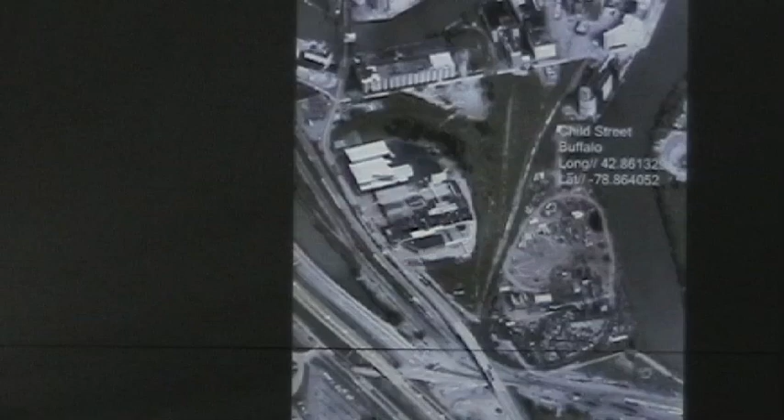This is the site right now. You can see that the new location is framed by these silos, and we wanted to engage a conversation between the two.

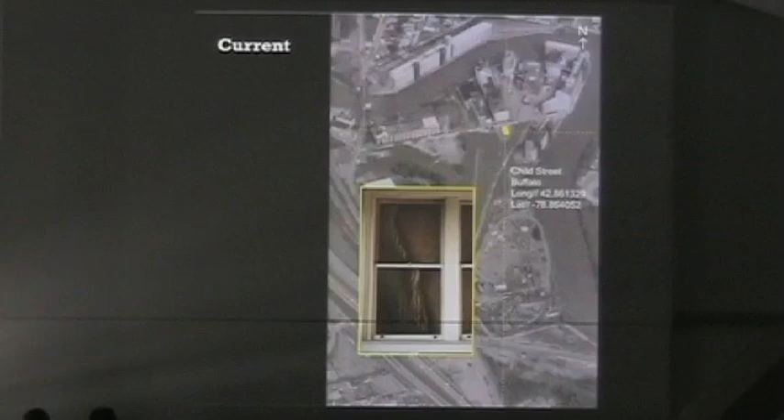This is the current location of the bees. It's within this building on a wall within a window, and we like the enclosure of the space and the relationship that the audience has with the bees through this window and this viewing port.

So we're interested in relocating the current experience of the beehive through the creation of a protected space for bee inhabitation, where humans are able to visually interact in a contemplative environment.

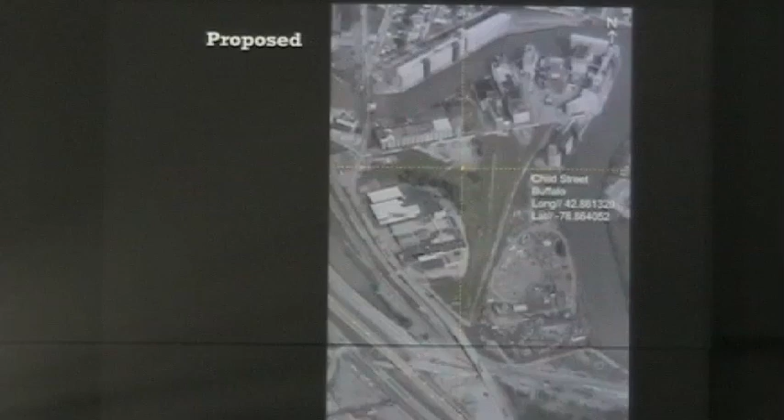This is our new proposed location for the bees. We placed it in this open space, hoping to create more engagement and activity in the open field that is currently there.

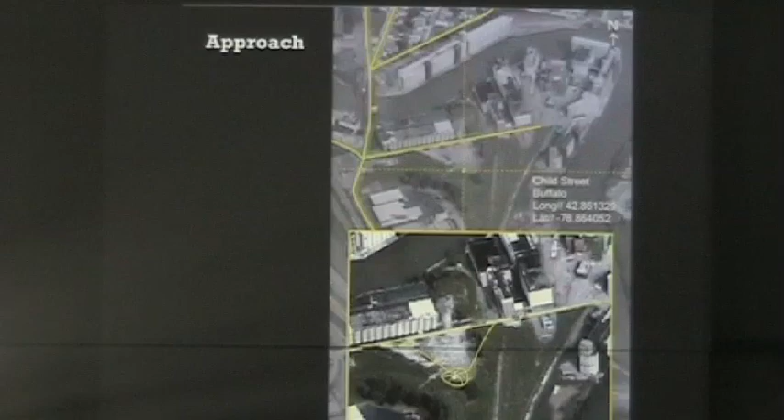We see this space as an opportunity for new paths that might connect the current approach to the site, which is these highways right now.

In doing research for the project, we found that bees are very strategic and intelligent about the placement of their hive, so we wanted to reflect that and try to match the intellect, if at all possible.

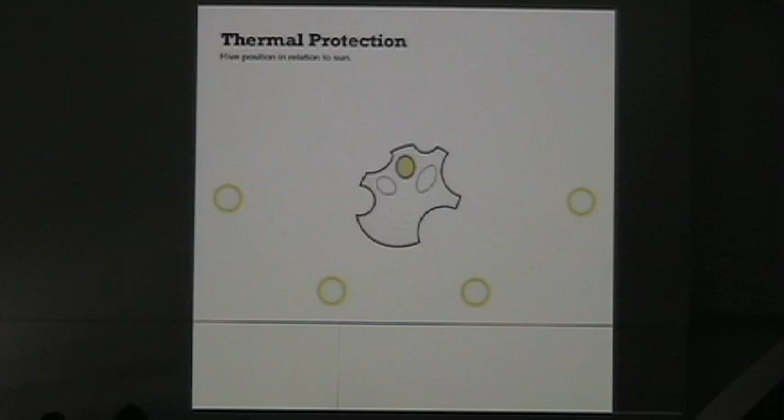So at first, we placed the beehive in the northern portion of the structure. This is to shield it from the harsh summer sun and hopefully keep the space regularly temperatured.

As you can see, the summer sun won't reach the beehive. So the beehive is located right here, and the summer sun will come down at a steep angle. This is at the highest point of the summer.

And then in the winter, we use apertures to attempt to bring sunlight in and heat the space by radiant heating.

To accurately account for solar relationships, the orientation of the project was tested in Ecotect to explore relationships between sun, shadow, and the project itself.

Another factor was the winter winds. We wanted to shield these cold winds from reaching the hive, so a large blockage was placed in the structure.

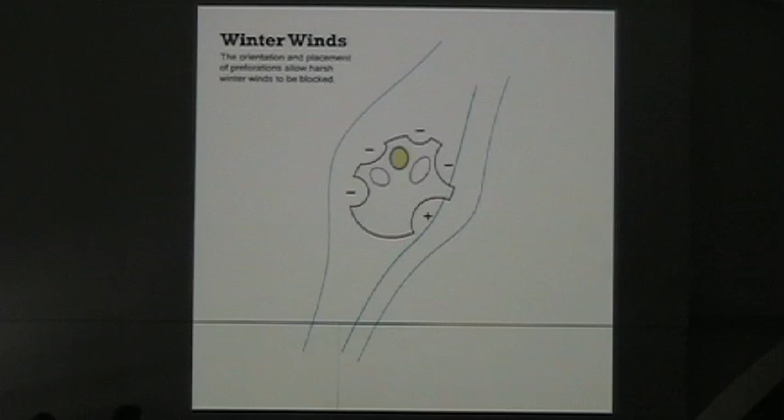So the southwestern corner of the structure is less porous and blocks winter winds. For summer winds, we allow for apertures to accept summer breezes, allowing for ventilation and natural cooling.

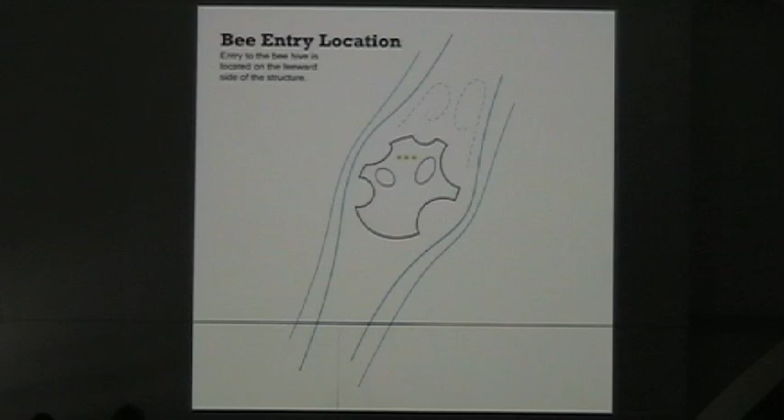As for the bee entry, we placed it in a place where there would be a calm spot in the wind, so the leeward side of the structure. This was just so the bees would have easy access.

Just as the height allows for the bees to be away from the wind, we also raised it up so that it would be elevated from predators that could possibly be in contact with them. It's elevated, and the entrance is slanted down and away from any rain that would be dripping inside.

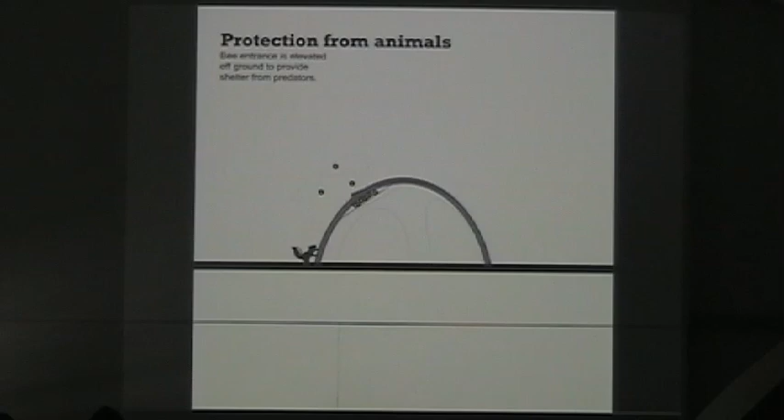And then, just as we allowed height to protect the bees, we also have varied heights of spaces to account for children and adults of any size. So that's showing the different height ranges, and these are some sections showing the different openings.

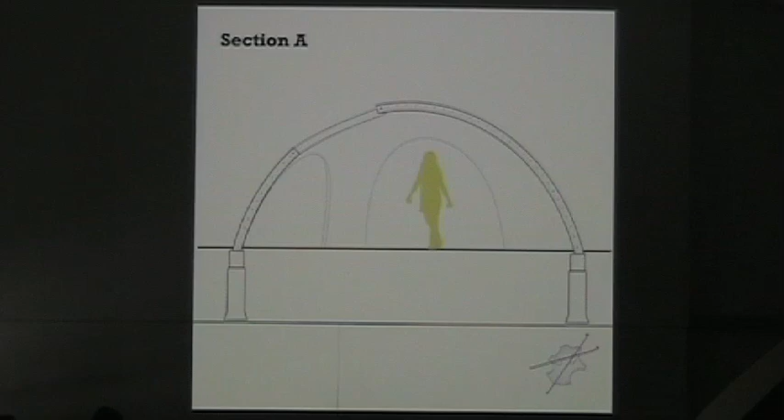Here we see the different views that are pieced together through these openings that were shown in the section. So we wanted to create a framework through these openings that would frame the landscape together, piecing together this landscape of all the grain elevators through these views.

Now you can see how you can start to piece together this landscape through these openings, and then we place the beehive right in the middle of that, so you can see it in combination with the exterior and interior of the beehive.

In this image, you can start to see a relationship developing between the enclosed space and the texture of that enclosed space and that of the grain elevators, the frames which it views, or the views which it frames. So you see this texture relationship begin to develop between these two.

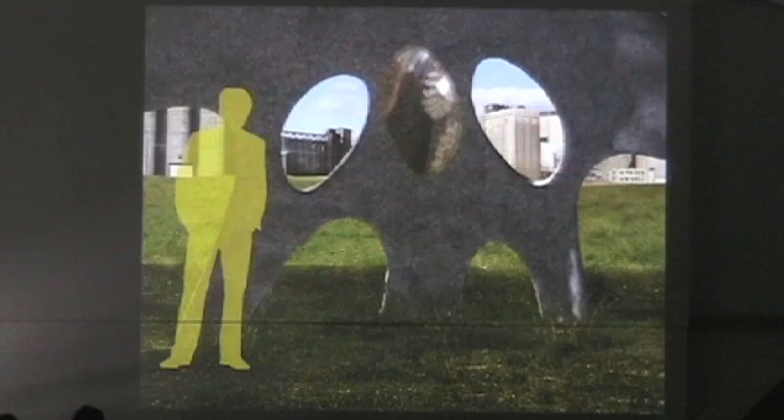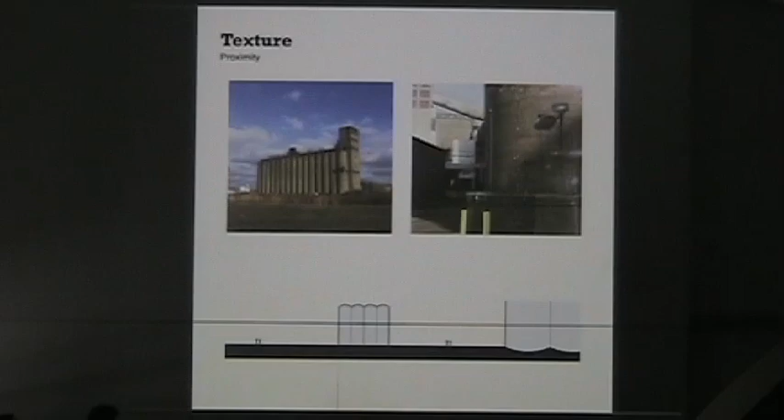With the grain elevators, from a distance we see these rippled vaults, kind of vertical vaulting, but when you approach them up close, you see a very smooth, austere surface. In our project, from a distance it appears as this smooth object in the field, and as you approach it, due to the construction techniques, it actually forms these pillows, so the same rippling effect is seen within our project.

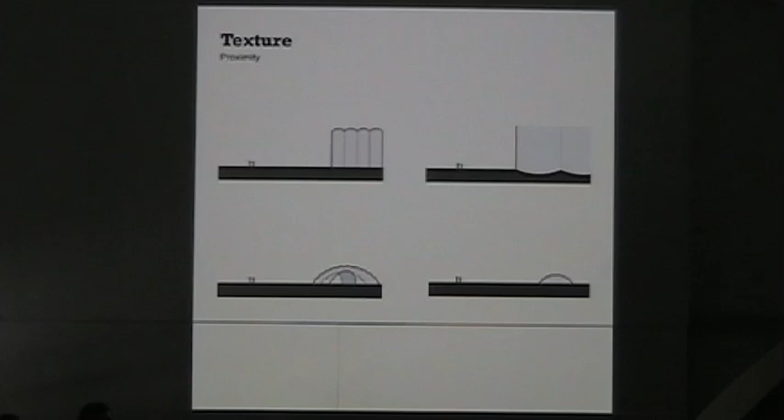Once you're inside the project, up close to the texture, you begin to see that mimicking and reciprocal relationship between the project itself and the site in which it is placed. Again, if you're close to the grain elevators, you see similar textures with this smoothness, so they have a relationship that speaks to one another through the construction techniques.

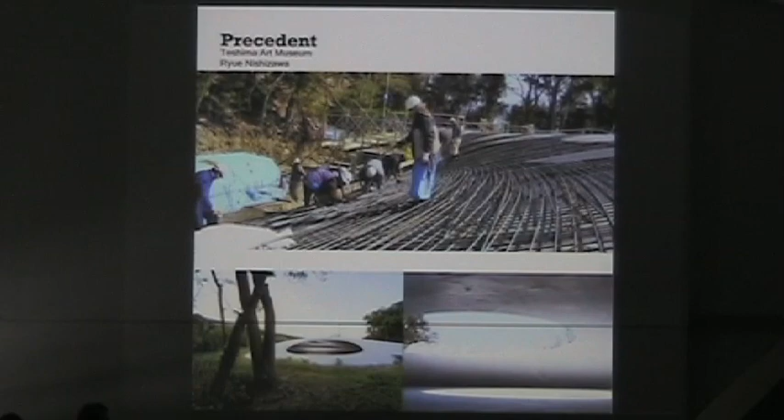To structure it, we looked to Nishizawa, who created the Teshima Art Museum, in which he used a terraform to create the form of the object, then excavated the earth within it using reinforced concrete to create the enclosure. In our project, we're using a similar formwork where we create an earth mound, tamped down in several layers, and then over that we propose to cast a canvas bag that we'll fill with concrete.

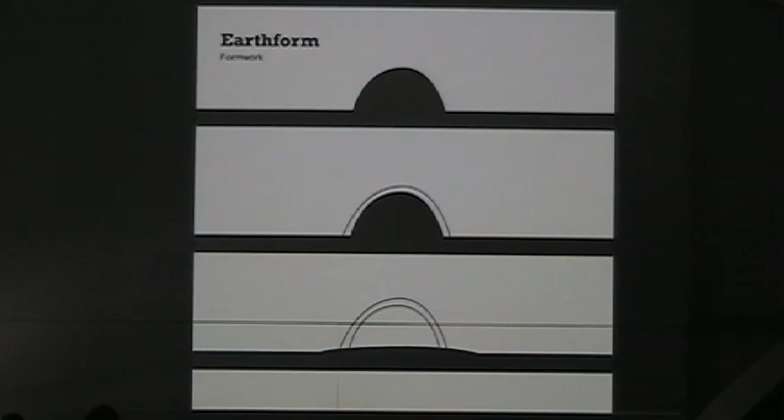You can see portions of that in our model, how the canvas will begin to form the actual structure. This is the process of how we built our model.

In this process, you can see how we're using this similar technique of creating the soil mound, tamping it down to build up to the form we're trying to engage in. We used different techniques to make sure this form was what we were interested in and the right shape, and then you can see how the canvas would literally just be draped over.

Inside of that is a wire mesh with rebar around the openings to support them, and then it would be filled with concrete to create this pillowed effect that is seen. Once this is done, the process is to excavate the dirt from inside, and you're left with this kind of sculptural object in the field from this construction.

So once again, reiterating the way that this form will be created and the foundation on which it will sit. This is the roof line. For entry spaces, there are a lot of points where different people and air, which we talked about, will be able to enter and circulate through the building.

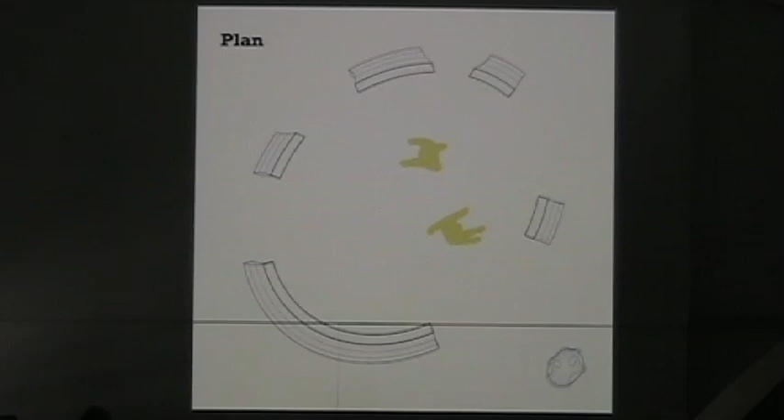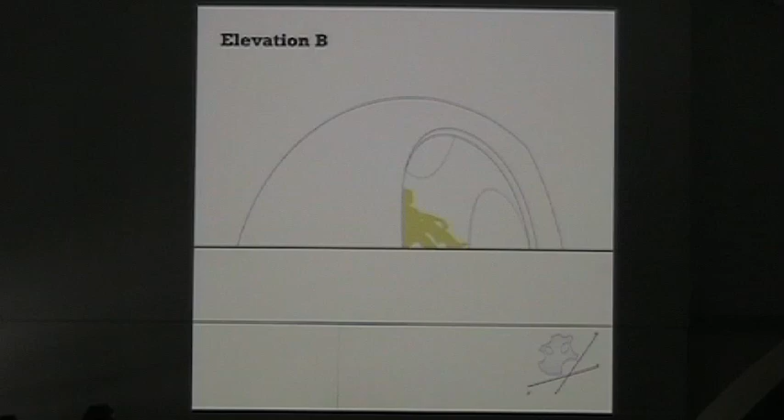This shows the relationship with the human, and our tribute to Rick. This is how the object would sit in the field in relation to the site, the pillowing effect, the ripples, and the contemplative space to view the bees. Thank you.

We also posed this to the beekeeper, and the response we got was that the bees will inhabit any surface, as long as it's the right climate conditions—the bee will adapt to anything. The wax they create is very adherent, so it will stick to any surface, even glass. In their current situation, they're actually attached to both plywood and glass, which shows how they can adapt to these different surfaces.

We're considering a plexiglass plane or pane that would sit in, trying to replicate the current situation so the bees are set upon something and enclosed. It offers protection for both the bee and the human while allowing them to be visually connected. The two surfaces against each other are concrete and glass—though it wouldn't actually be glass, more some sort of plastic—and they enter from the outside, which creates that separation between the humans and the bees.

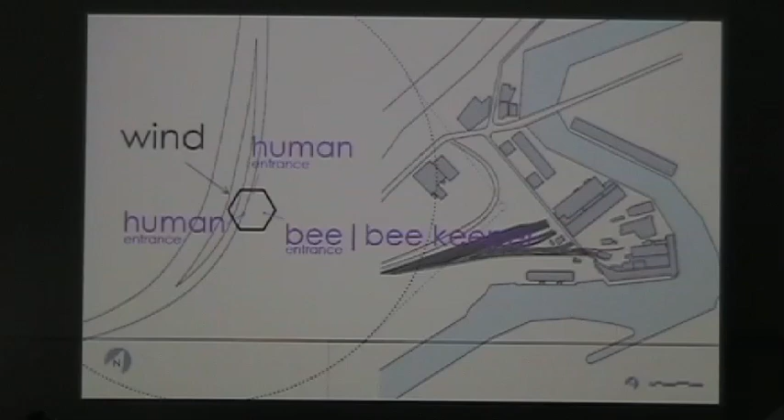And our general materiality is the structure would be steel, and then panels that actually enclose the hive are metal and glass, and then the actual box or the bee cab where the hive is located would be wood for a little bit better thermal mass.

Here's maintenance, and there's a pulley system in order for someone to be able to lower the hive, and then there's a door that opens up where it would be large enough for someone to stick their arm in. The depth of the beehive is small enough where you could stick your arm in and actually be able to reach all the way across.

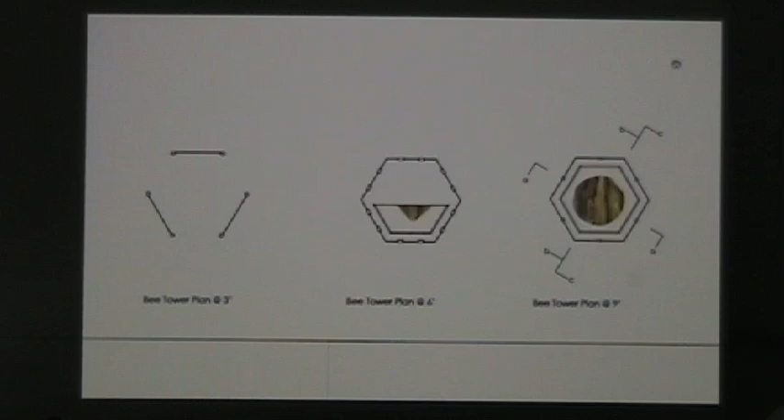So the bee cab is also a hexagon with a diagonal cut for greater viewing, and it slides up and down. There's 3 holes for the bees to enter, each an inch, and then in our outer skin we have panels, parts of them open up and allow the bees to enter in the same orientation.

Here we have an access door for the beekeeper to get in and clean or maintain the hive whenever he needs, and all he has to do is lower it. The material is plywood, 1 1/4 inch thick, that will protect the bees and give them warmth, and we also have the double skin which will add more protection.

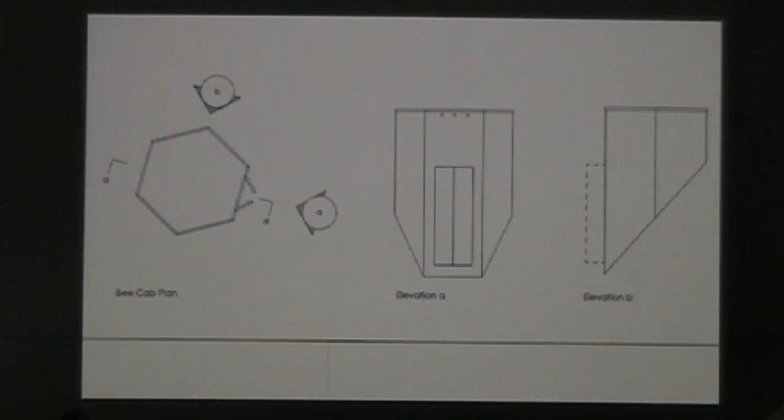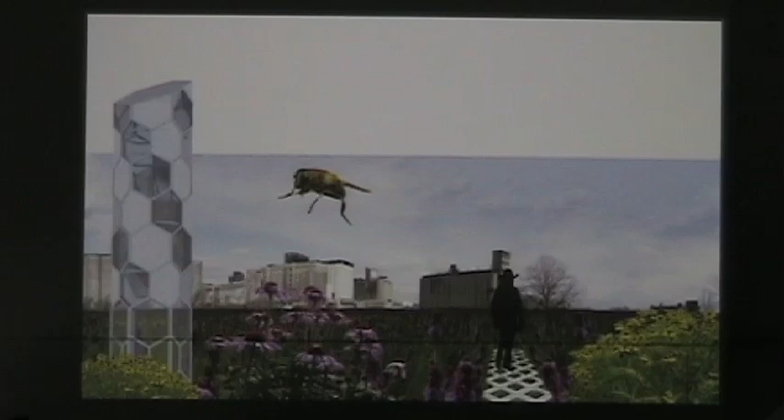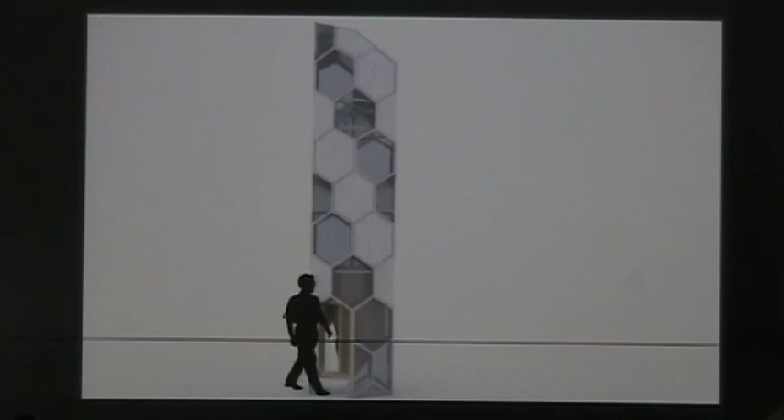Here's some model photographs, so you can see the entry for the bees when we open our panels. It also looks at how it breathes. And then here you can see the entrances, which are about 4.5 feet tall.

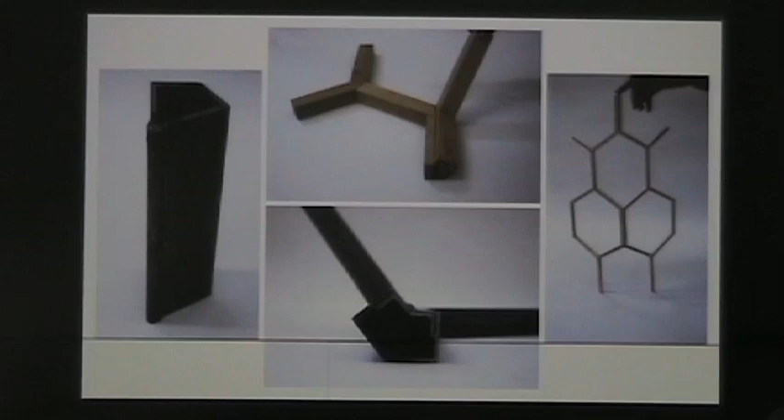So we basically looked at fabricating a tower out of just standard steel sections. We had some earlier tower designs that had columns, and then we wanted to get away from columns and open the corners up. So we kind of started to come up with this kind of structure where the column is kind of staggered.

This was an original size column which, we learned from the engineer, we could make smaller. So we basically worked out a system with both 1.5 inch steel tube and then 1.5 inch angle and 3/4 angle to get the 60-degree corners we need in both plan and section.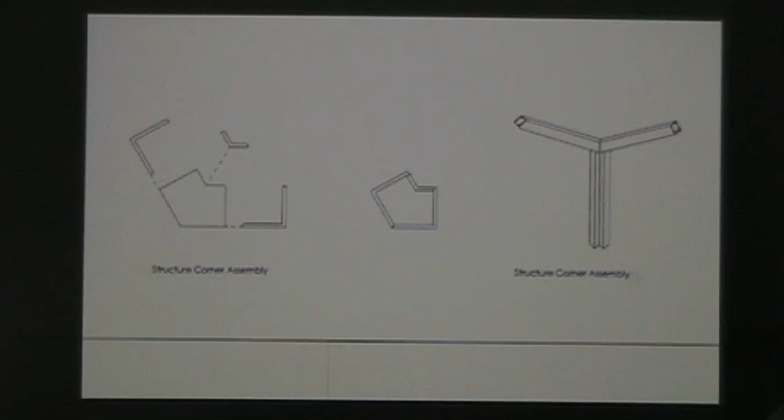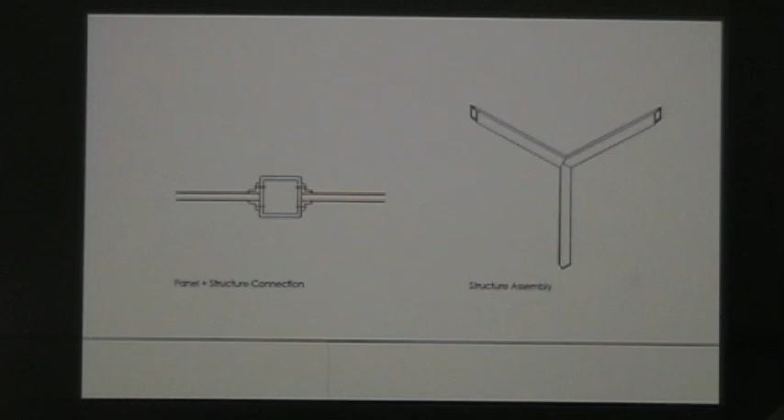And then this is showing basically how the panels would be inset into the structure. The way the panels are here, so it's just showing that's on both sides. And then Dan, you might want to talk about this.

Yeah, I'll cover more about the foundation in a bit. This is just sort of a construction diagram for the vault footing, the foundation.

So basically what we have is the loads being distributed through a structural web, and there's 3 tension rings or compression rings within there, and they each have a dual purpose. The 2 ones on the bottom are for a seal, so the bees, when it's moving, can't get to the people at the viewing area beneath. And then the top one is the actual rig for the cap itself. So those are their general locations, and they'll provide stability for the structure.

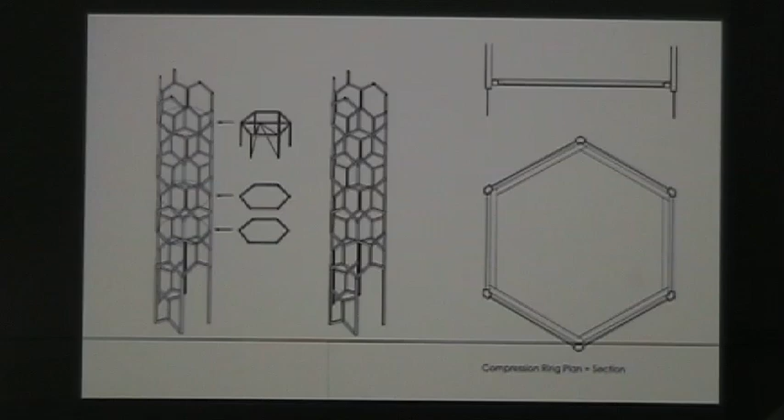So I did some quick wind diagrams and calculations in order to figure out what we would need for the foundation. There are 2 options for that. We have vault footing, which is shown here. The actual number was 10.8 kip feet for the overturning due to the wind, and the calculation also takes into account the rough shape, it's a hexagonal solid tower structure.

And here's the other option we had in mind, a buried slab, and this also goes through the calculations for the overturning.

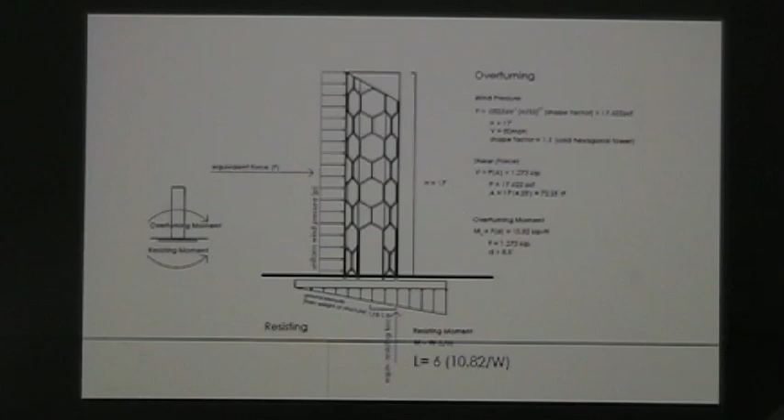So this is just a quick animation showing the process of actually constructing the thing. It's going a little faster than I could speak, but you can see what's going on.

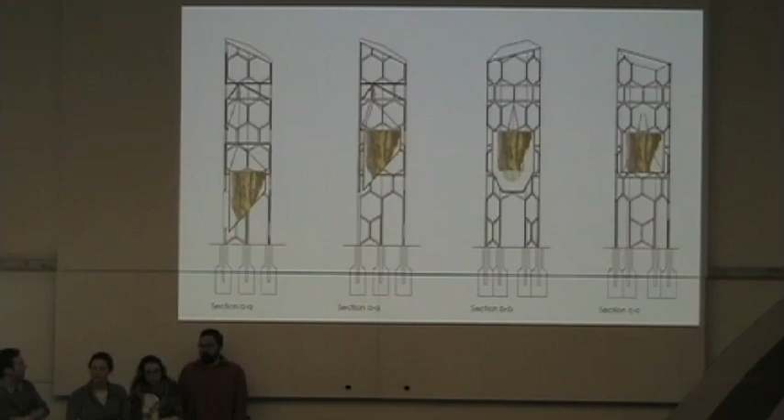Can you not have the additional compression rings? That seems like overstructured. We could. Currently, well, we definitely need the top one, we need something that holds the entire net up. Why? You've got a hexagon at the top of the tower. Well, I guess we wouldn't technically, the bottom ones are just, there has to be something on top that structures it.

We could bring it in at angles. You could frame a lid. Right, that will change for it. It just seems like you've already got a lot of steel, and if you think about your compression ring, because you have a fully welded structure, is that right? Yeah. Okay, so instead of your compression ring being like this, your compression ring is like this, going around. So it's not that you don't have it, it's just a bit more complicated. But it just seems to me like you could eliminate it.

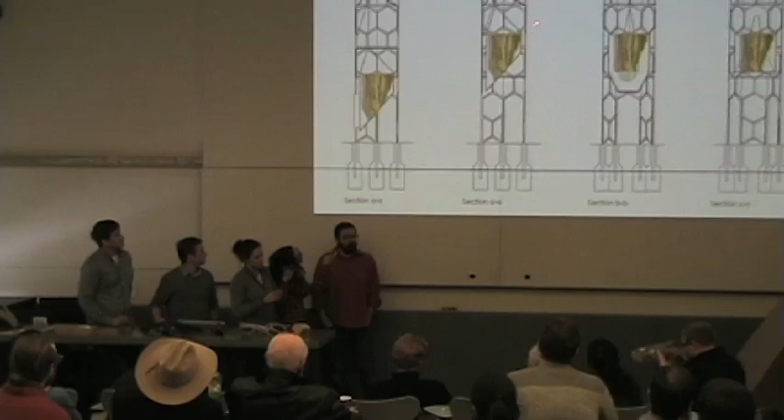The other consideration though is seal. We worked it in, we wanted from day one to have a seal, so it's kind of this area where only the bees can get in. As you move the cap, we don't want them to be able to slip out. So we're going to have a gasket around, so there's a distinct separation between the bees and people. So then we worked in the compression ring with that. I mean, we can rework the seal. That's my fault, doubling the compression rings.

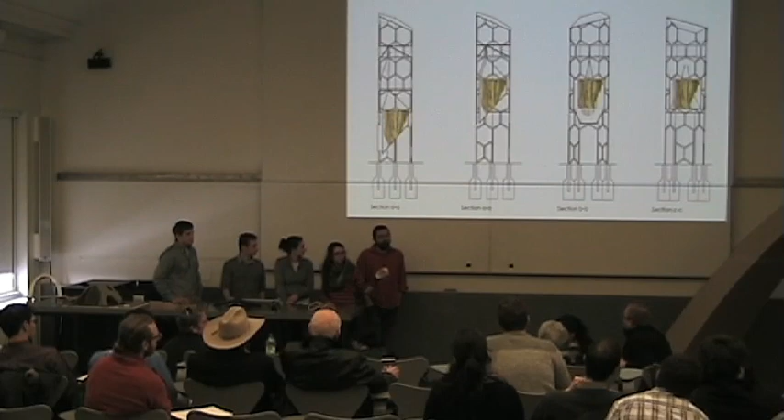The diagonal slice on both the cap that's picked up on the form, yeah. At the top, why is the geometry different? This is just a clean slice, but here the geometry starts to bend. Playing with that model, that's actually different than the drawings.

So I built a model. I mean, the model's sort of a working model where I was just playing with the surface and seeing what it could do.

I think there needs to be a cohesive approach for the geometry and the patterns. Right now, it's something here, something there.

So you're saying that only the beekeeper would be able to lower the ladder? Well, anyone else who has access to that key. So people who are just walking on the site can't lower it. So how far above the cliff is it?

It's like 6.5 feet in the air. So it's really close, yeah, if they were standing in it, their head would be here, they'd be looking on, when it's in its raised position. That's in its raised position. So it's always visible, whether the beekeeper's there or not.

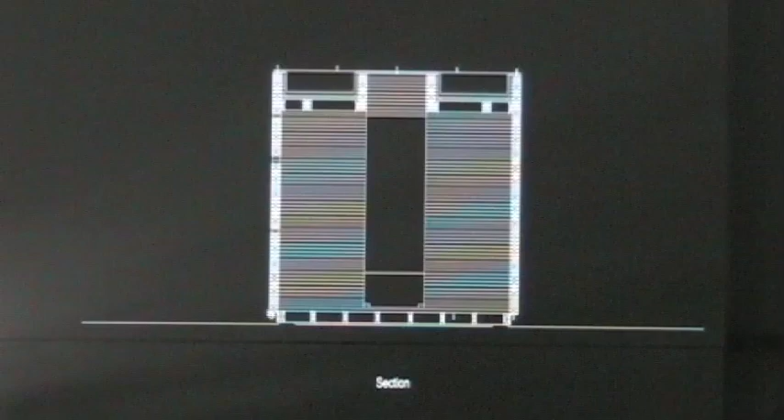The bees live in this little window over here. That's our new beehive, installed in the opening. That can be removed for inspection, or if there's any problem with the bees.

Oh, I'm going back, I'm sorry. I'm the one that's going backwards.

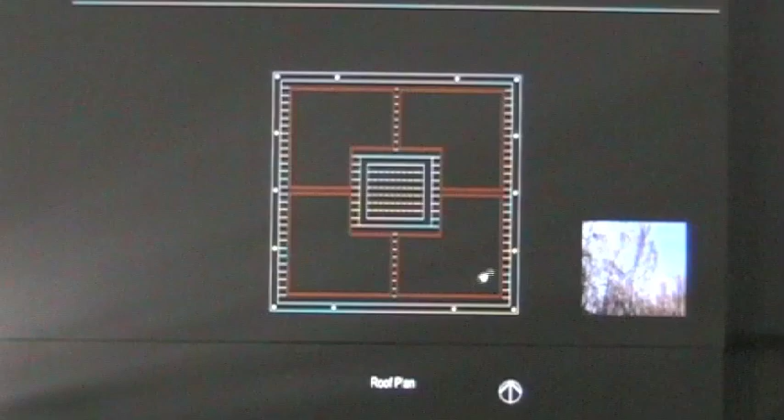Again, in the ceiling, the oculus is open to allow. And in the roof plan, there are indigenous plants, as we mentioned, growing in these boxes.

The west elevation has small holes, loaded up with sticks for other insects to inhabit the building. My teammate Scott said something really nice about those: nature thrives on competition. So rather than being a house that's only for bees and only for people, we've tried to pose the question that other species will live here in all of the projects, and why not offer a habitat for those as well.

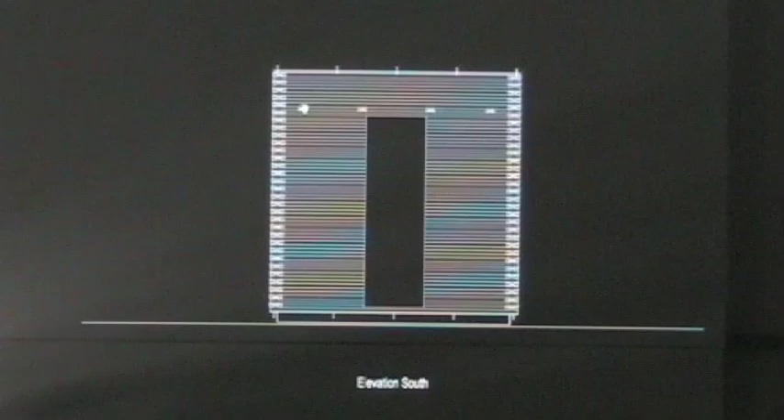The east elevation simply describes the construction. The south elevation shows the human door and also hints at what is to come inside. And the north elevation is the entrance for the bees.

So that panel is just situated in the building, and these little holes are the bee doors. So again, the project is based on the experience of just going into this thing and observing the bees.

It's exactly what we've started out with: a window in a room where people can quietly observe bees, hopefully not disturb them, but just enjoy their company for a few moments. Thank you.

It's just over 10 by 10, a 10 by 10 cube. And the floor to ceiling height on the inside is, I think, 8.5 feet. And then the roof garden—it's not really a roof garden, but it's recessed below so that the plants kind of just flourish on the top.

Did you talk about the site? Its autonomy from the ground condition means it can really be placed anywhere in that field.

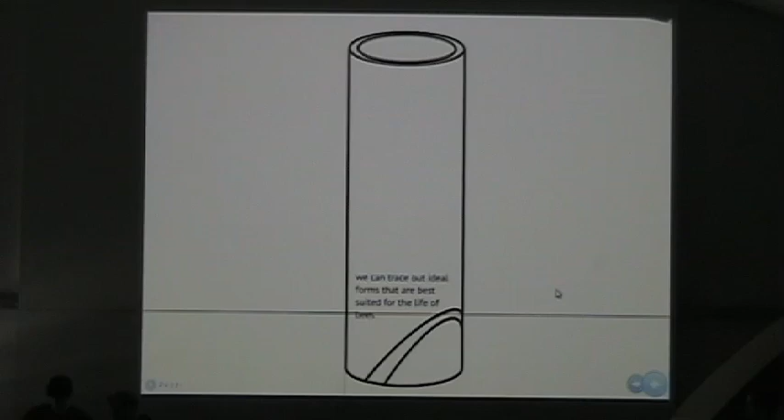Using the site that surrounds the existing colony and the architecture of the grain elevators, we can think about formal qualities that the cylindrical shape contains, and how we can produce effects that connect the beehive with visitors, the bees living there, surrounding nature, and solar patterns. We trace out forms and derive the right geometry from these elevators, giving people a different perspective on this older generation of transporting grain versus this newer generation of transporting bees and honey.

In response to the site, we tackled a few major issues. One was analyzing traffic patterns and how we can orient the sculpture to draw visitors in from the west side, the east side, and the north side, bringing them into the park.

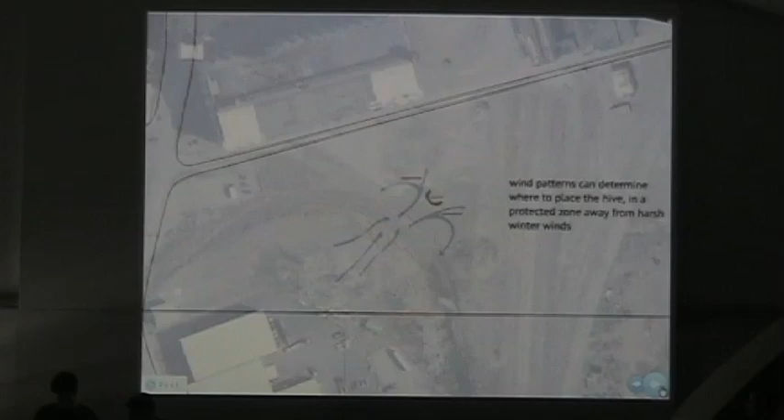Winds come primarily from the west and southwest, and bees don't want harsh winter winds. They usually build hives in small crevices where wind doesn't affect them, so we designed the structure to split the wind, protecting the hive on the inside layer of the project.

The last thing we analyzed was how the sun would react to this. In the morning, when it's cooler, the sun warms the hive and the bees react, starting their day as the sculpture warms up. At midday, when the sun is at its peak, the thermal properties of the material we're considering, concrete in one example, would heat up and release that heat slowly into the hive overnight, reducing temperature fluctuation, which is better for the bees.

In summer, when the sun is highest, the sculpture protects the bees from direct sunlight, since they don't like constant direct sun. In winter, when the sun is lower but it's colder out, you want some sun to heat them up. Chris is pointing to where the hives would be—since the sun is lower, it would touch the beehives directly, as modeled in the smaller model.

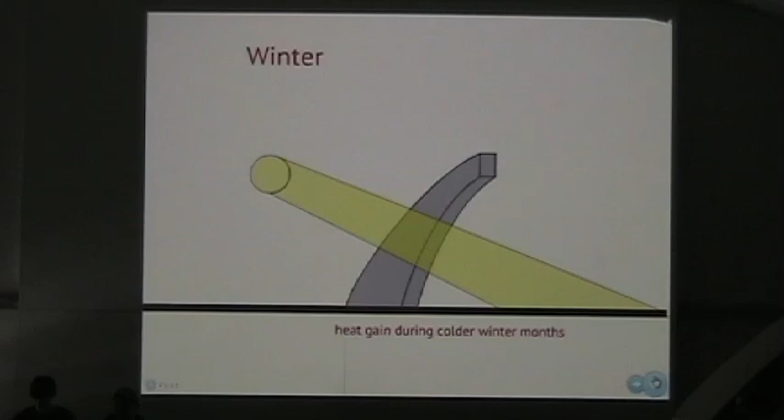As Vincent suggested, one material choice is concrete, and you can see concrete is all around the site, which was one reason we chose it. Other reasons include thermal stability, and it provides a solid mass and rigidity for the bees so that it's a solid structure they can live in.

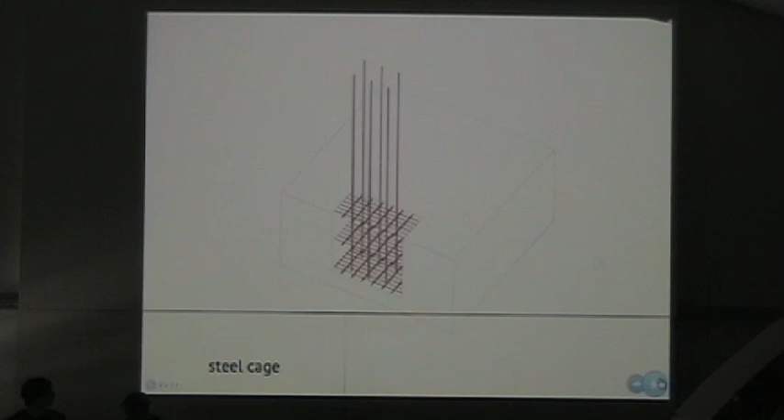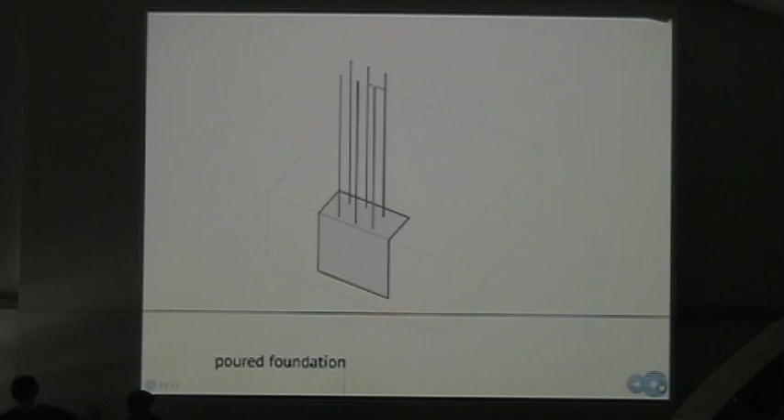For structure, here's the order it would be built in. First, we'd dig into the ground and create a steel cage with rebar coming up from it. Then we'd pour the concrete foundation, which counterbalances the leaning arch. Then we'd begin bending the rebar into the actual shape of the structure, with supporting structures like a steel cage wrapping around the rebar.

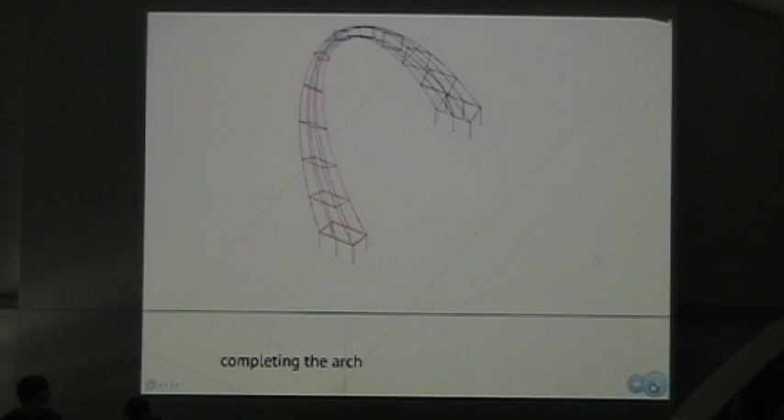Since the arch is symmetrical, we'd do the same for the other side and tie the two together. Then, for pouring the concrete, we'd build a formwork using 2x4s and 1/2 inch or 3/8 inch thick plywood, and get the completed arch once we remove the wood.

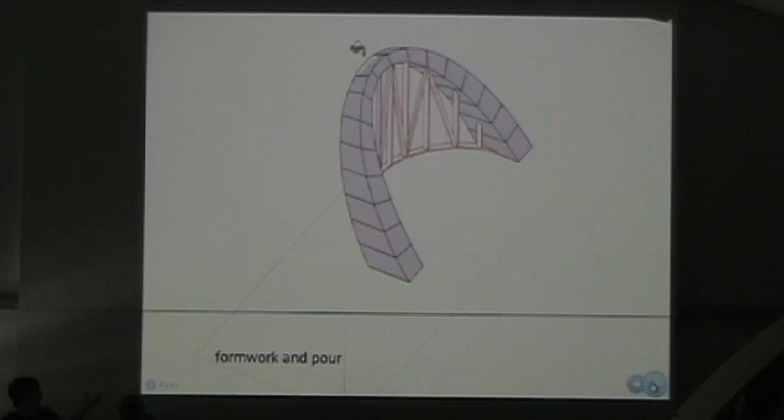So how do these actually live in the space? Where are they, where's the enclosure, manageability, and the entry and exit? Here we are—this was me taking video the first day visiting the site. You can see this unique habitat they're currently living in, how beautiful it is for a person to actually see the bees, and we wanted to keep that similar in our own structure and reflect that.

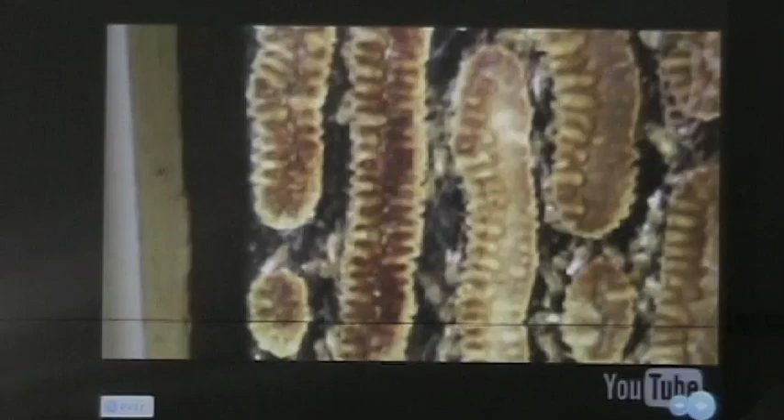As we begin to look at an individual module of the beehive, you can see the materials are exactly reflected from the materials that were in the original window. But we want a continuous form for the bees to live in. So the wood is cut out to allow for circulation across each module, and you can see the holes at the top piece that would allow for entry and exit.

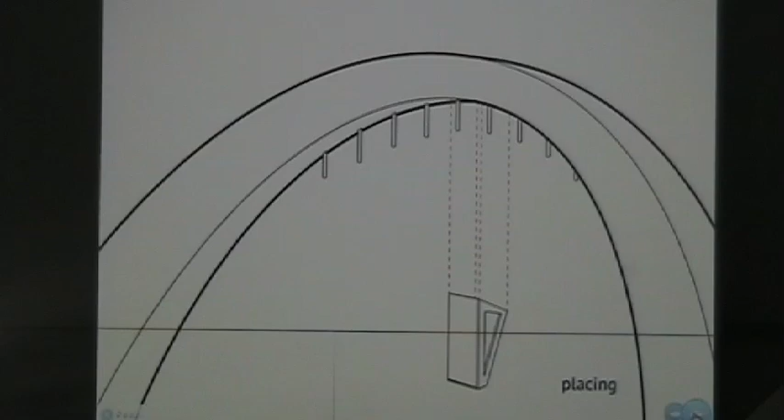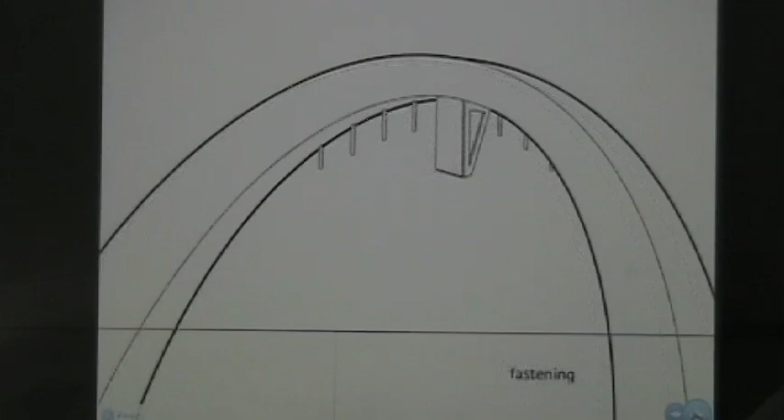The rebar, we would have precast bolts, which would be cast into the concrete, and then these boxes would be bolted onto the rebar. That's how it would slide into place. And then these would actually be arrayed around the arch, flowing with the arch itself, but still maintaining a difference between what the structure is and where the actual bees are.

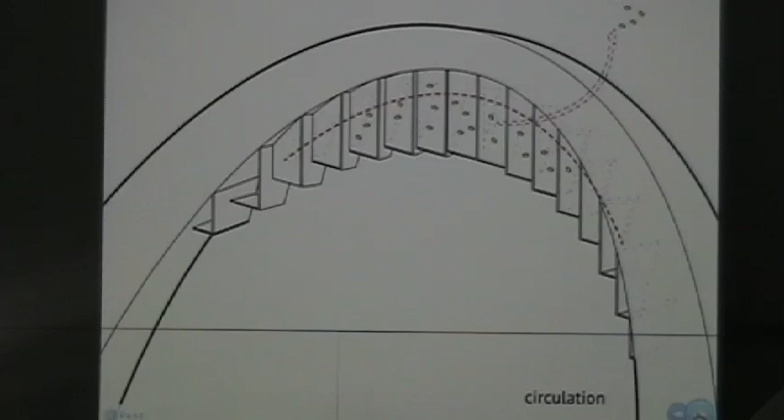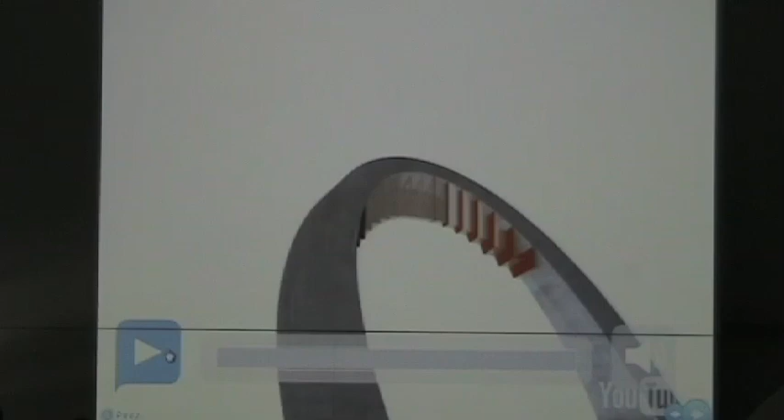Another thing that's interesting here is the way you approach this, and you can see how everything is structured on the inside. Not only would you be able to see the hive, but how the circulation patterns work and where the exit actually is in the model. Again, this is just a section showing the continuity in the box frames and how the bees would flow through it.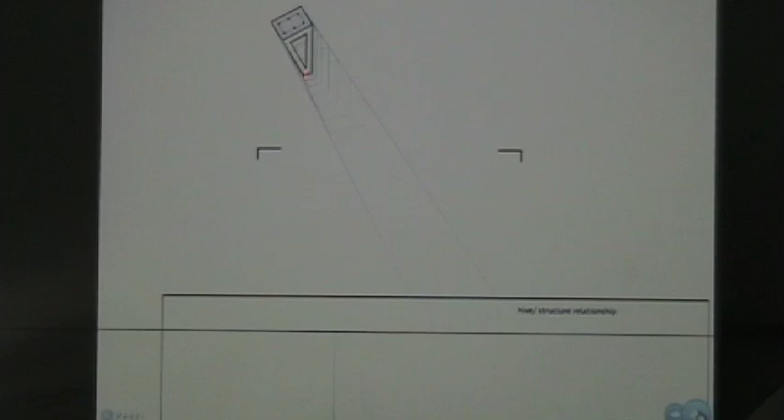So what does the completed project look like when we consider form, site, and materials? This is the final result. We would consider placing plants around the structure, and I think that's it.

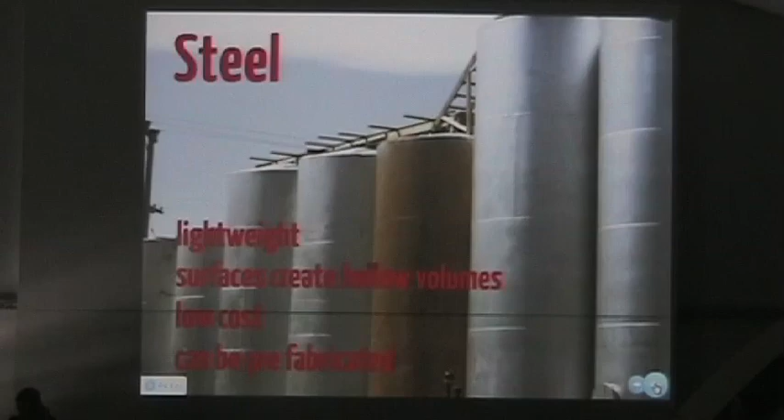We started considering another route because of the cost that concrete would take. So we started looking at steel, and concrete is heavy and solid, while the difference with steel is it's lightweight. With steel we can incorporate the bees within the structure because we can make it hollow, and the surfaces create hollow volumes. Steel is also low cost and can be prefabricated.

So applying the hollow nature of elevators that transfer grain to a sculpture that will house the bees, we then do the structure, which includes the foundation, framing, sheathing, insulation, and exterior cladding. This also mimics some of the grain elevators and their hollow nature and this transfer of grain, so we were thinking about, with the steel, the transfer of honey and the circulation of bees within.

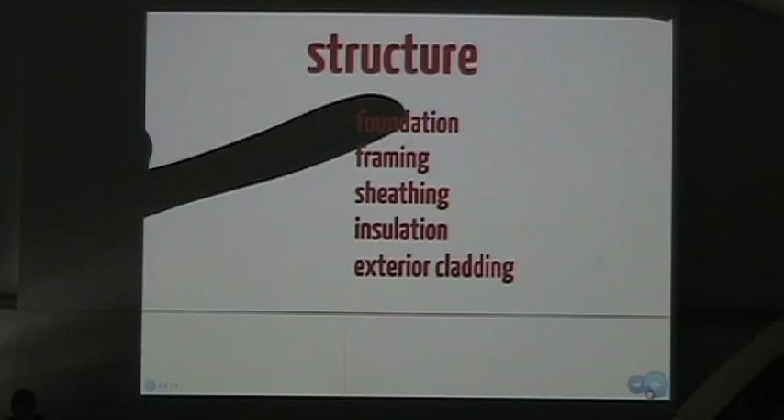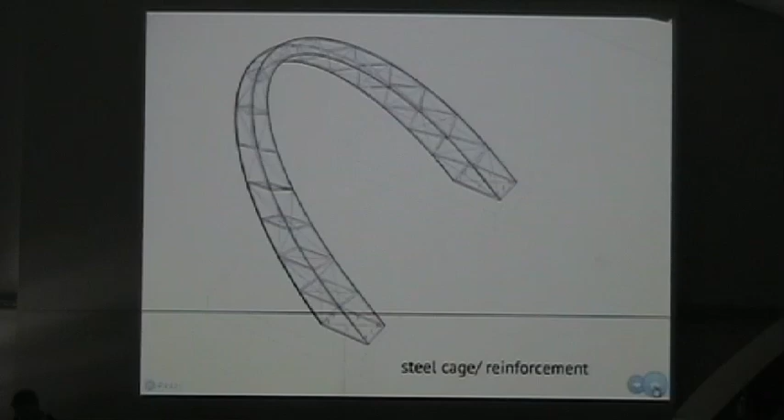This is just a drawing showing the foundation and how we would have these steel plates that would be bolted onto the foundation. The foundation will also be a lot smaller, which allows for smaller cost. Then there's a steel cage framing and reinforcement that's applied, and then we start applying the sheathing. Then we were thinking about the insulation within the structure, which would be made of wood.

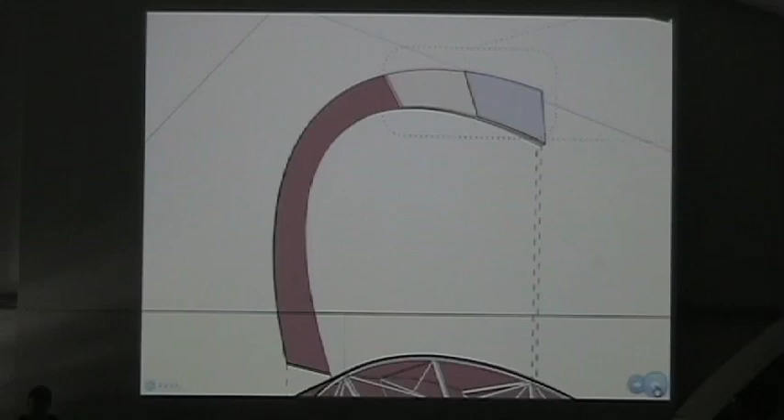We would have wood, represented in red, spray insulation, and then the steel itself. Because steel has more fluctuations in temperature, we wanted to find a way of insulating this differently, which concrete already does because of the nature of the material. Steel can gain and lose heat quickly, so we needed to find a way to insulate the space. That would be it, completed.

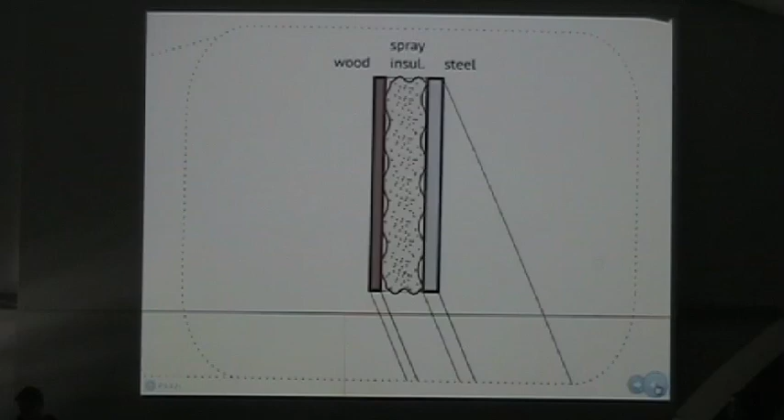These plan sections show the cutouts that would mimic the framing inside, and then these would have glass panels, so that you can see the bees and the bee hives forming within.

Thinking about the hive system and the manageability of the steel, we looked at how these things would be taken off, so there would be three panels that would come off, bolted in place, and each have glass on them so you can see the bees. This again shows the circulation and how it's continuous along the arch.

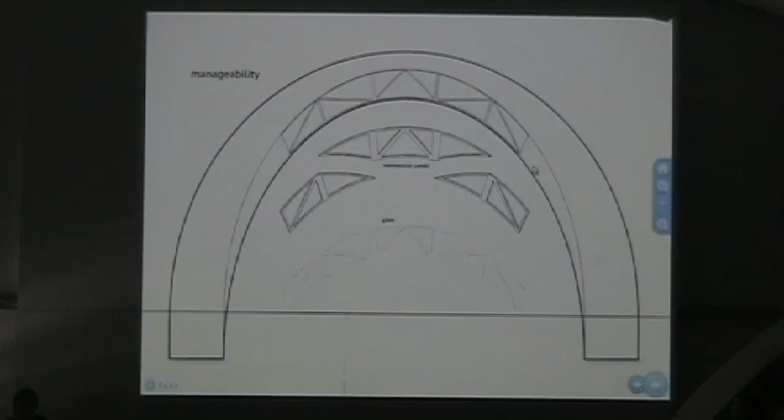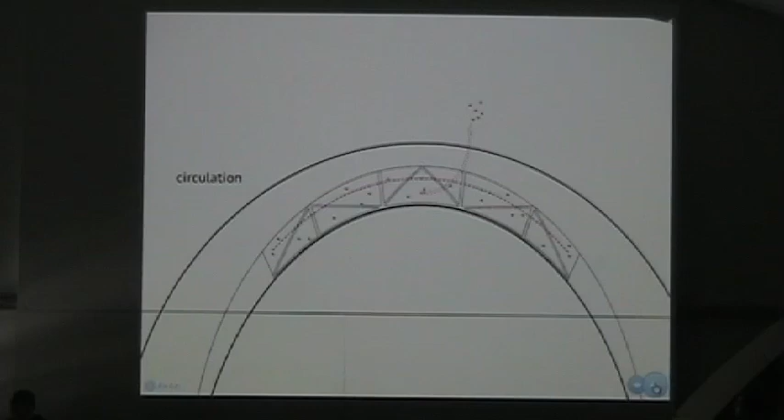So we were thinking Cor-Ten steel and how to integrate the structure with the rustic feeling of the surrounding site.

So basically the aim of the honey elevator is to capture the essence of the Buffalo grain elevators, as well as to facilitate a safe home for bees. Both the steel and concrete proposal would yield completely feasible yet different results, unique to its material and design.

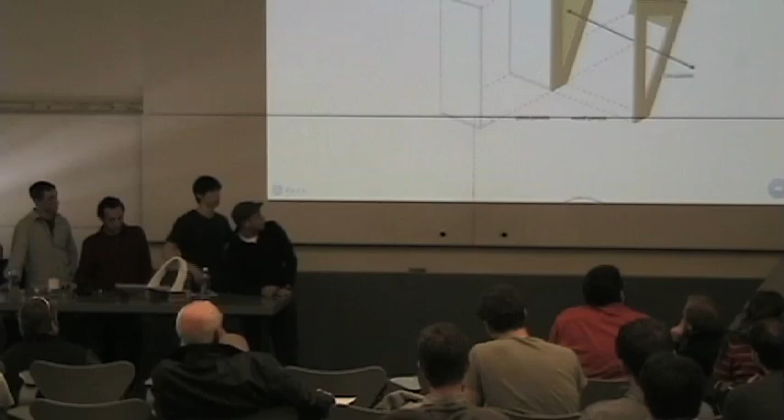And the other option is accessibility and visibility. Yeah, it's actually the whole—we broke it up in thirds, and it's about a 2-foot by 3-foot panel that would come off.

Well, the steel one's angle is actually steeper because it's lightweight. With the concrete one, it's higher up because of structural purposes, so it would be about a foot lower. For this one, we actually have to account for the height of someone walking through, but the steel one you don't have to worry about that. This is the concrete one, just sit on the box.

So what is your preference, if you have to choose of the two, or is there an addition? Yeah, I think there's an overall discussion about this that we've always had, about which one we think is better. They both have positives and negatives, so we're not really leaning to one side. That's really why we just had two proposals, because we know they're both feasible, but they both provide different effects.

In regards to the shape of the arch, I remember in the poster it was wider. I wonder, solar-wise, when it's so thin, shadow—I doubt the performance in terms of shadow for the big height. The second proposal is more protected, but in the concrete proposal with this kind of shape, I think it's a bit too exposed towards the sun.

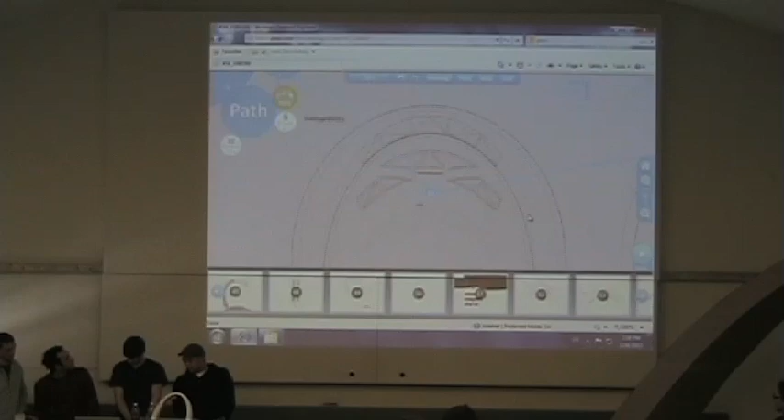So these would be bolted into place here. There'll probably be a pin or a locking mechanism that only the beekeeper would have the key to, so that kids don't cause much of a hassle, since it's pretty tall anyway. We broke it up into thirds so that the weight is more evenly distributed, so you're not taking out an entire panel on its own. They could get broken up even more if it turns out to be too heavy.

So it's bolted, you remove bolts to insert the key from the other side. Yeah, for both the concrete and the steel one, they exit from the other side.

In this case the beehive is a little bit hidden, I mean you know it when you're underneath, but in none of the proposals is it obvious that there's a beehive. But I guess in the other one it's more clearly expressed if we're far in the park. Yeah, the strength here is also this integration.

But when you're designing these cuts, is that related to the structure? Why do they take these shapes? It's related to the structure. They could actually take any shape, it doesn't really matter, but we found it interesting to relate to the structure.

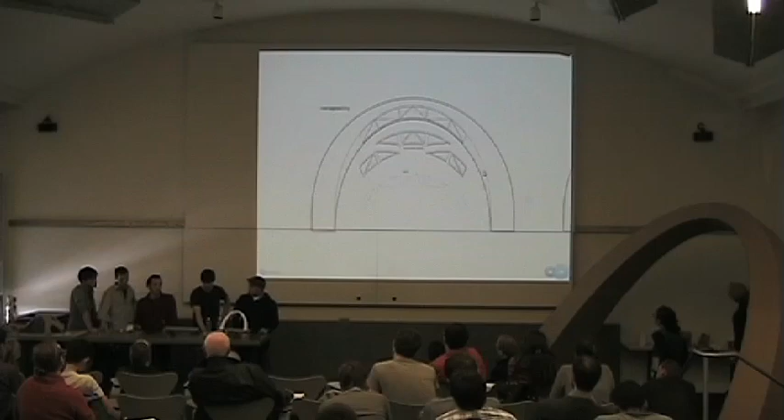How did you guys decide how big to make the hive itself? We wanted to keep it at least 3 or 4 feet above the ground. That was really just the major concern we had, that it wasn't too low. We also thought about maybe shifting it so that it's not symmetrical, leaning towards one side so that you can get eastern sun during the morning. If the sun is coming from this direction, this might shift a little bit, and that might be more efficient, better to use.

Are there heat limits to what needs to be tolerated? This is going to get quite hot, isn't it? What would you do if I said maybe there should be more ventilation? Would your solution be putting more holes in the steel? We'd probably try to think of a way where we could make ventilation holes, but not exit and entry holes.